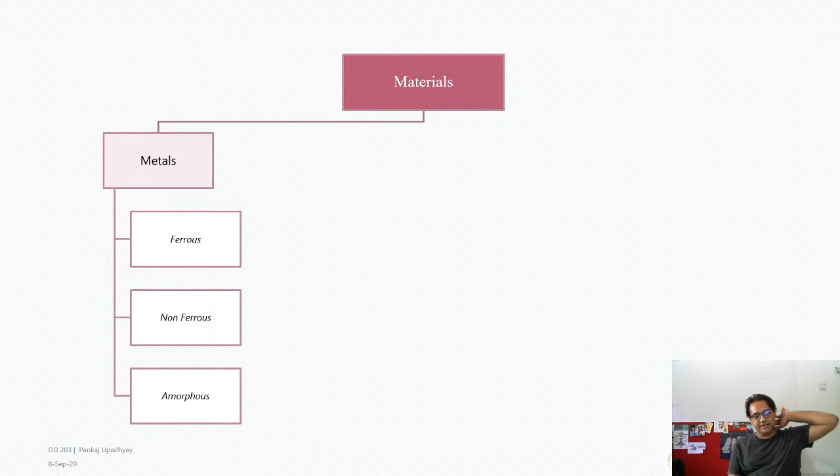But anyway, let's start off with the class. So we discussed this yesterday, and we discussed the kind of materials that are there, and from here on in this class, what we are going to discuss primarily is about properties of material.

So what do I mean by properties of materials? There are some interesting properties of materials which help us determine the uses of it. So, for example, some mechanical properties are important when you are designing for strength of a part - things like ductility, elasticity, hardness. We will discuss what each of these properties are. Some of them I think you already know, some may be new terms - like maybe fatigue is a new term for you. We will discuss very briefly what these are, and we will try to analyze how they may help us in the whole design process. And then there are some physical and chemical properties of materials, right?

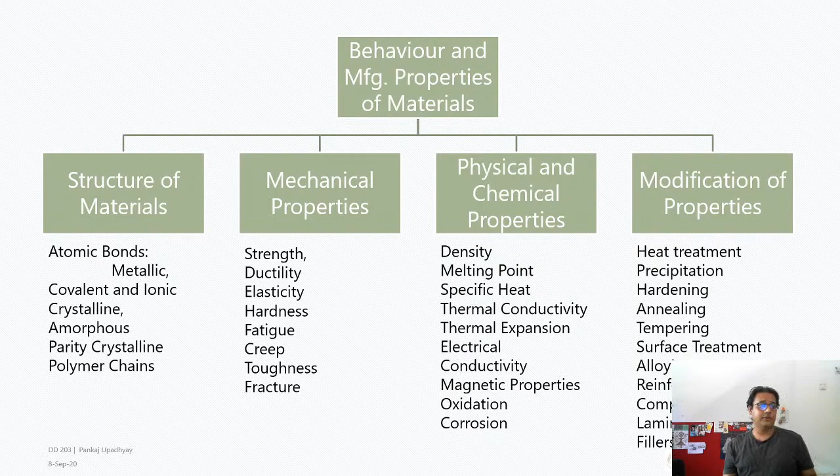Some of these topics you've already learned in your earlier classes, or rather I should say in your school, in your subjects. So let's take a look at some of these. I think most of you know about this - you are aware of these diagrams.

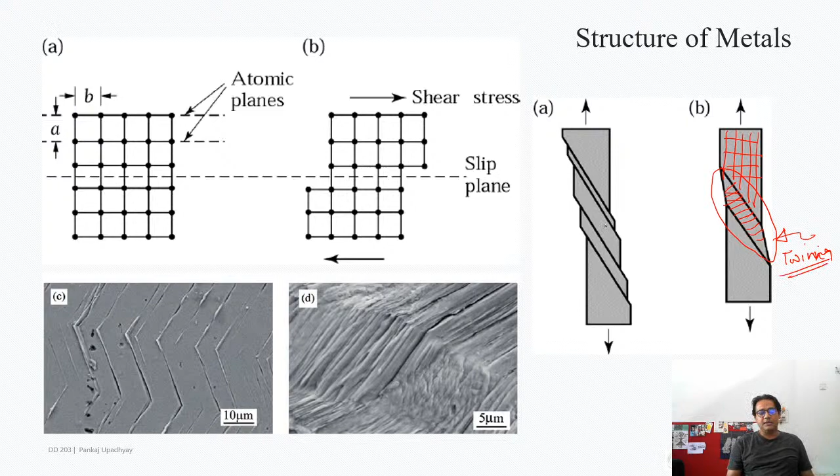So here let's say it is arranged like this, but as you start applying force, some part of this area, the whole crystal structure gets distorted, and you have this kind of failure where the crystal structure reorients itself to form this kind of twinning space. So this is called twinning.

Okay, let's move forward. Now those things I showed you were related to a single kind of crystal structure made out of a single element. Most often what happens is that you never get a proper element with a single crystal structure made out of a single element atom. In the real world it is almost impossible to get a single crystal block made out of a single crystal of an element without any impurities.

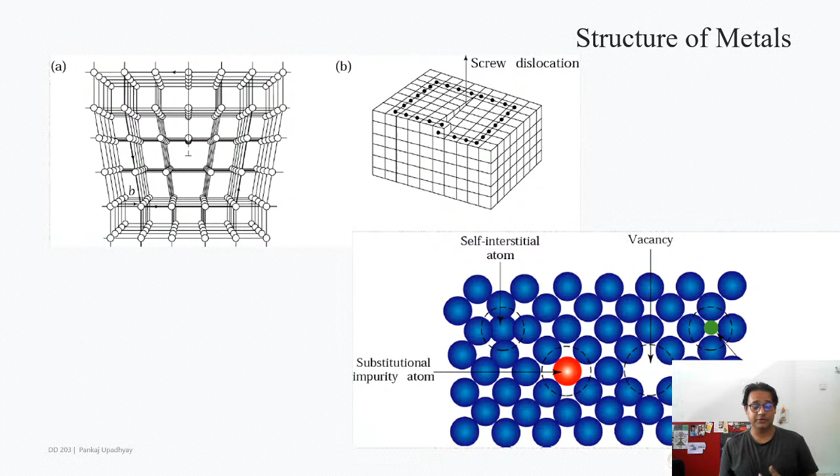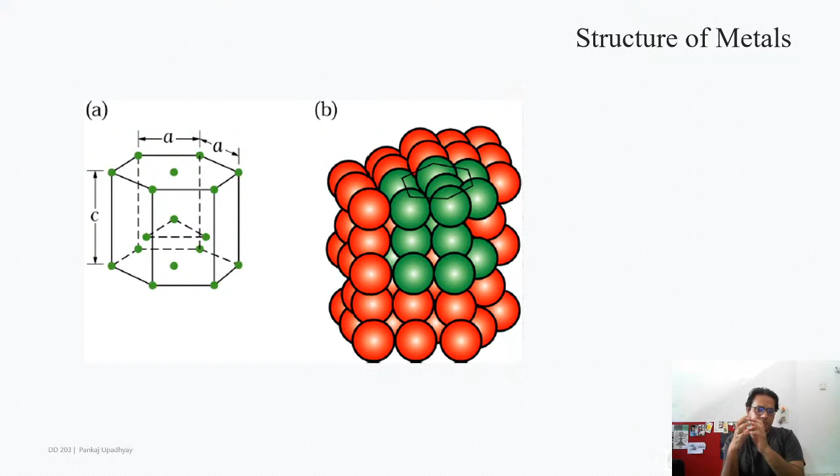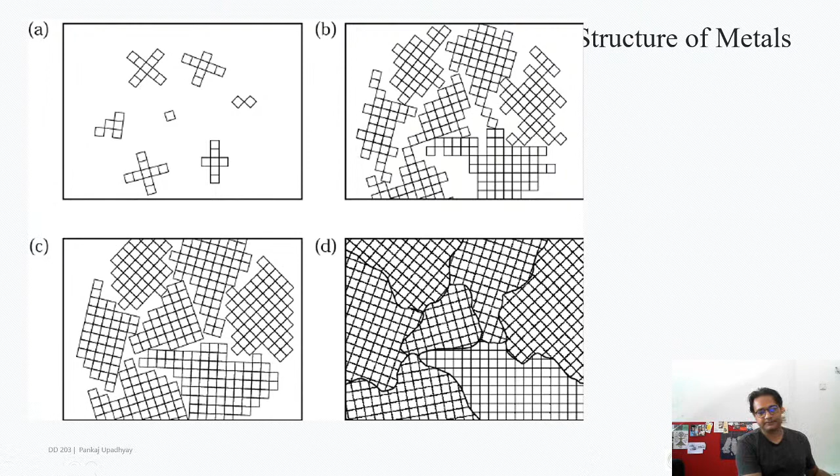So what we have seen is, at a very small scale, how atoms are arranged in a certain structure. This image shows a slightly zoomed out picture where a lot of crystals are arranged in a certain manner. And this one, if you zoom out even more, is what you will see. What you will see in a piece of iron under a microscope are these boundaries, like these boundaries.

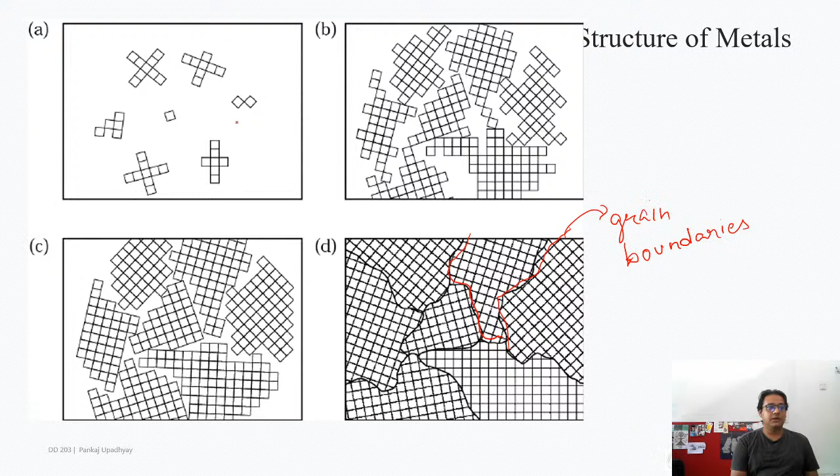These are called grain boundaries. The reason these form is because this white space is liquid material. In liquid material there is no crystal structure - all atoms are moving around freely. But slowly, as the material starts cooling down, in some places the first crystal is formed, then some more, then some more, and there's a small area where crystals have formed in a certain manner. Let's say this one is alpha iron, which is BCC, and similarly there are some more areas where another crystal forms.

As you can see, the orientation of all of these is slightly different. This one is oriented like this and like this, this one is oriented like this, and so on. As these grow, new crystals are formed at these locations, and these locations are called nucleation sites. As the crystals are formed, you soon reach a situation where the crystal can't really grow and bumps into the other growing group of crystals. As the material cools down, you get these kinds of boundaries which are formed - these are called grain boundaries, and these have a tremendous effect on the properties of material, especially steel.

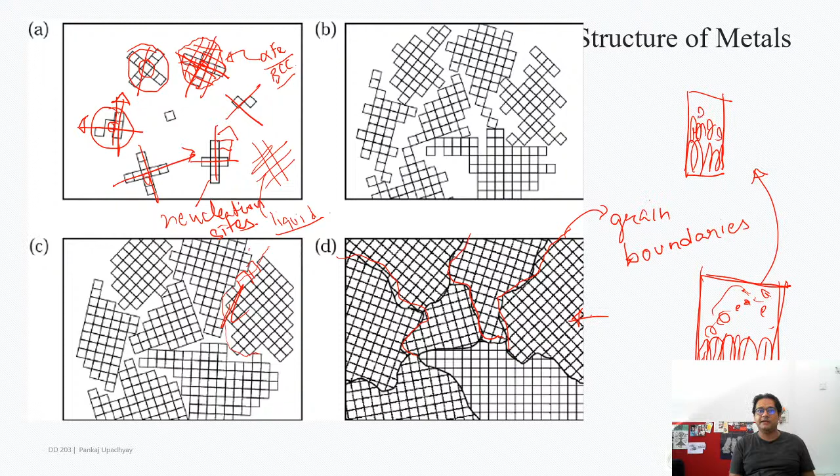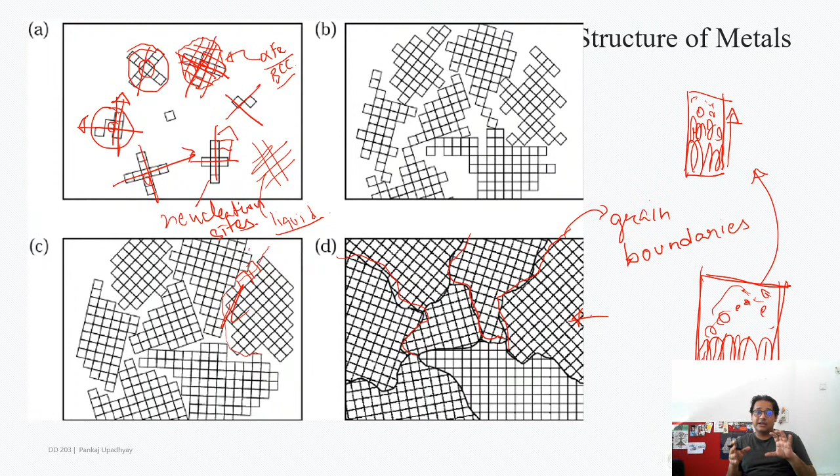Here you don't necessarily see the flow of the grains. But let's say you have a piece like this, and you have a bucket of molten material, and you cool it from this side. What happens is you will get a crystal structure something like this. Larger crystals are formed here because when nucleation started, all of this was molten and the crystal was able to grow along these lines. As it goes forward, you have smaller and smaller grain sizes. So finally, when this thing is cooled down, you will have the grains arranged in some manner like this. There is a definite direction and orientation to the grains, and the way the grain sizes are arranged has a lot of effect on the properties of the material.

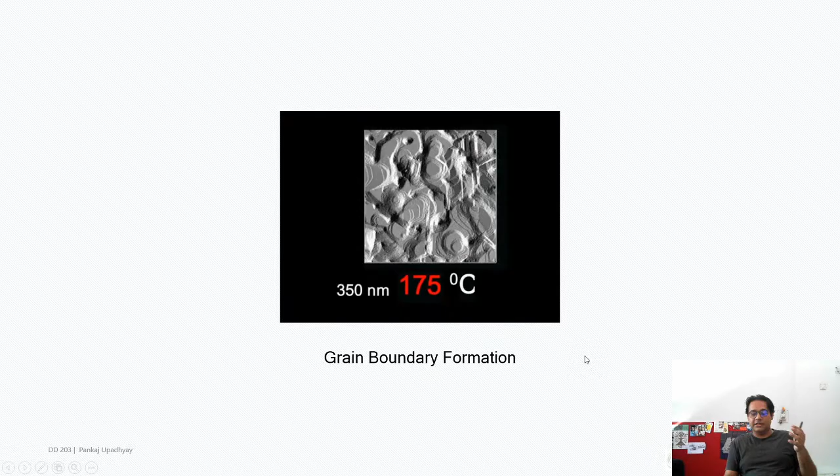Let's see if this runs - there's no sound here. Here you can see actually material getting cooled down, and the grain boundaries kind of disintegrating and merging into each other. I'll leave this in the presentation so you can see it later and observe very closely how things happen - this is the real thing.

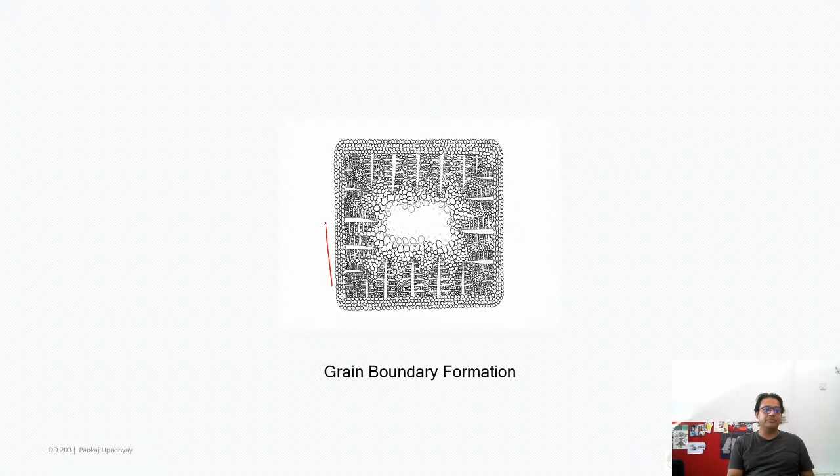As I said, if you have a block of liquid metal and you expose it to air, it will start cooling from the outside, since the most heat is removed from the outside, so you get this kind of grain boundary arrangement. As in the previous slide, each one of these dots have the grains oriented in a certain manner - which manner we are not particularly concerned with - but each one of these grains forms a space within which the crystal arrangement can be found.

Now you can see this in a lot of other places. If I just do a Google search, let me see, I will try to show you.

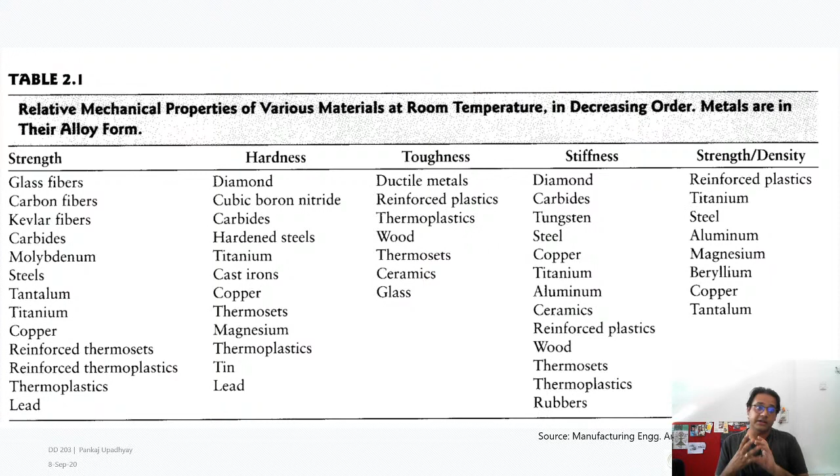Toughness - reinforced plastics and thermoplastics are tough, whereas glass is not tough. So now it's becoming slightly confusing. What exactly is toughness, and what exactly is hardness? There are specific ways in which we define these terminologies, like stiffness, strength, strength upon density. These are all mechanical properties important for us to know about in a material while selecting it. So I want you to search and find out and understand very clearly what toughness is and what stiffness is. We will discuss it still, but let's move forward.

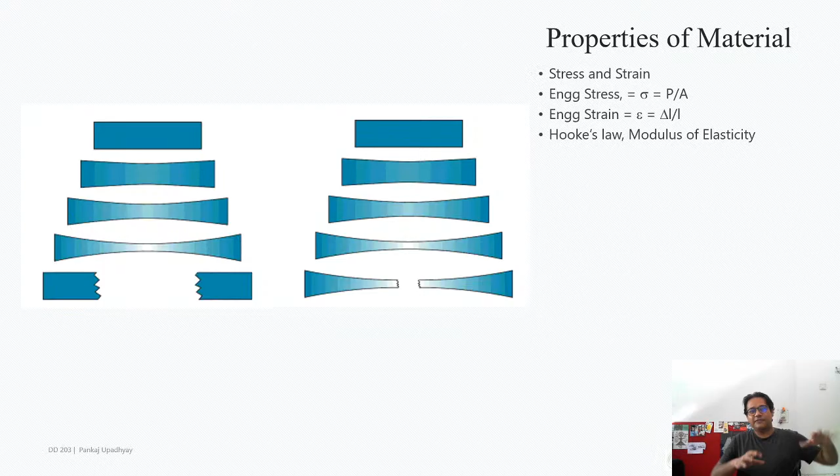So again, this is one of those slides where I ask students, can you tell me which material is elastic and which material is not elastic? Something like that. But I will keep this slide here for you. The important point to take from this slide is there are two very important properties of material we should know about when selecting materials: stress and strain, or rather how much can a material...

WBN is the hardest, I believe. I think it's not a naturally occurring material, but I may be wrong. I don't know what WBN is. Ace says WBN is the hardest, I believe. Okay, we will see.

So you have read about Hooke's law. Hooke's law defines a constant called the modulus of elasticity, which is the ratio between the stress and the strain in a material. What is stress? Stress is the amount of force per unit area applied to that material. Let's say a standard piece, a cylinder, is taken, and you apply force on both ends - a certain amount of force. If you take the cross-sectional area and divide that force by it, you find the stress that part is withstanding.

As long as a part is not breaking, it withstands that stress. Strain is the amount of elongation, or rather the ratio of the elongation to the length. So let's say it's a cylindrical part, and we apply a force enough to move the piece, stretch it a little bit. How much it has stretched relative to its original length, that is the strain that piece is going through. The ratio of the stress and strain is Hooke's law.

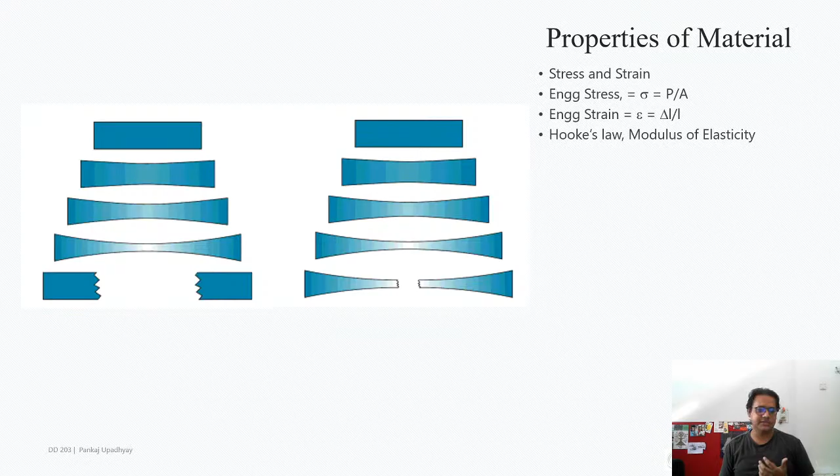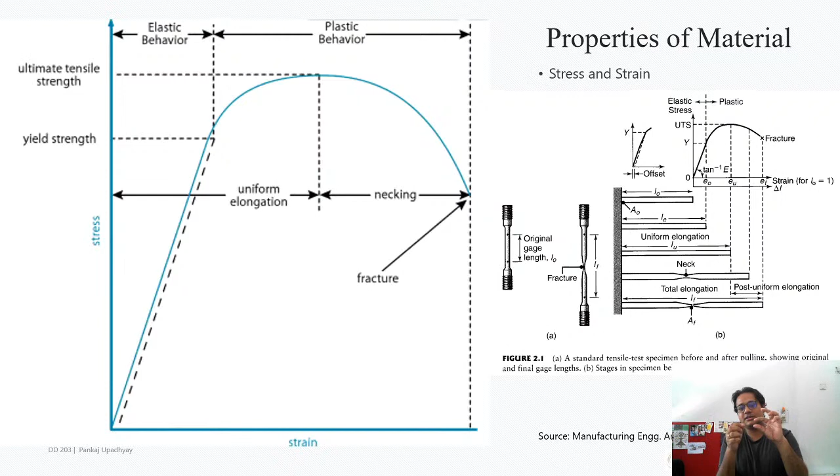I'm going to say something a little disgusting here, but you can see this. Take a chewing gum, eat it, and if you're not disgusted by it, take it out, hold it nicely, and apply a little bit of force. Once you start applying just a little bit of force, it will start elongating. So with very little application of stress, the part is seeing a huge amount of... Aditya, don't do that with boogers, please.

First material is elastic, is what Shreya and Devanshi are saying, right? Okay, we'll come to this.

There will be a point where, with the existing amount of force already applied, the material will keep elongating without any additional stress. This point is called the ultimate tensile strength. This is where the material has started failing, and you will not be able to apply more stress because the material has started deforming so much that there is a loss in internal stresses, so the stress the part is withstanding decreases.

At one point, the area where the graph comes down is called the necking area, and eventually the material will break. This is what you will see has happened.

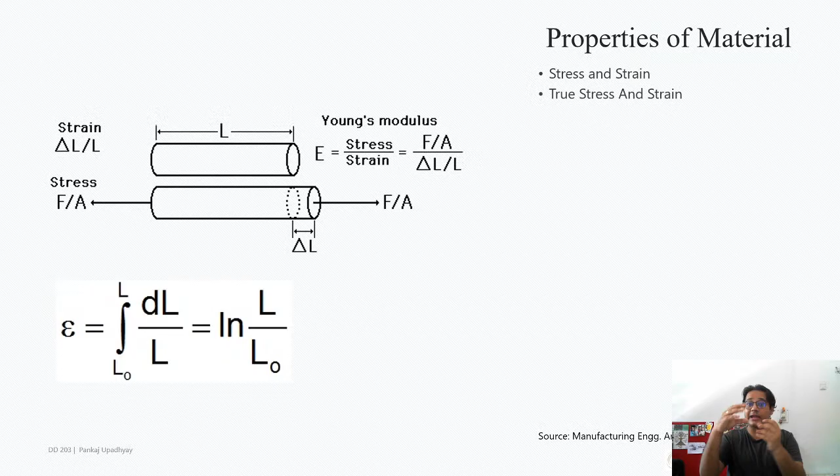So what you saw here, the Hooke's law, is actually, I shouldn't say wrong, but it is slightly misguided, because one thing that is not considered in Hooke's law is that as you are applying more and more force, as the part experiences strain, there is a distinct change in dimensions of the part, meaning the area gets reduced. That is not considered in Hooke's law, but you need it when you want to calculate things more accurately.

No, Cyril, I think the video, I saw the message, the video is public right now. Okay, anyway, let's move on.

As I said, in Hooke's law, that change in area is not considered. So we can calculate the true stress and true strain by considering this change in area. There is an integral way of calculating this using integration, but it's not important. I've kept this equation here for you to reference later.

Ace says you won't lose the lecture, it will just get demonetized. Yeah, anyway, I'm not looking to make money out of this, but okay.

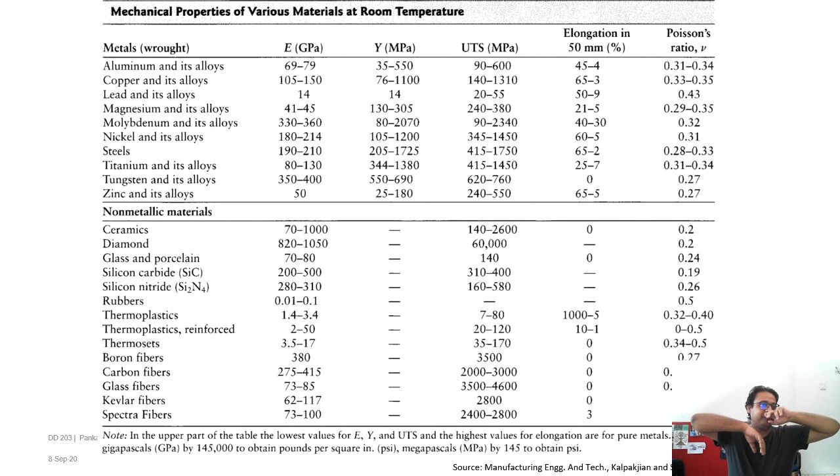Right, so that was Hooke's law, and the ratio of stress and strain is called the modulus of elasticity, or the Young's modulus. I think that was clear, right? There are two more constants which we will not talk about here, but if you read the section in the Kalpakjian book, you will get to know all of this, and I suggest you do that.

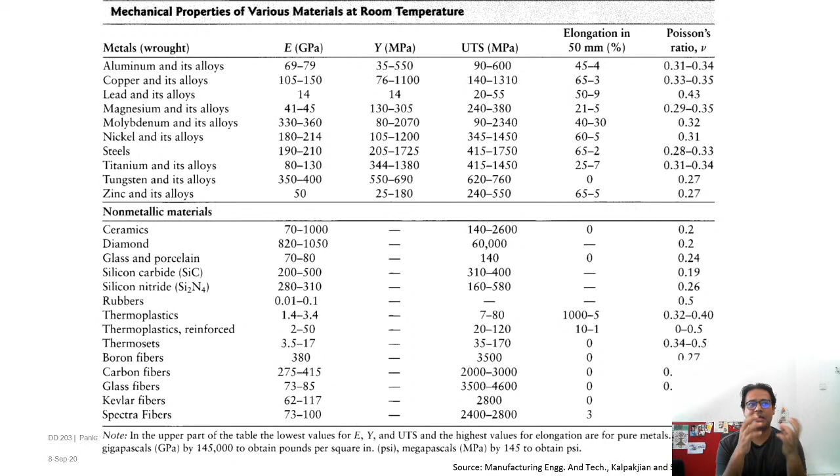Right, okay, so in this slide we are showing the modulus of elasticity, the Young's modulus, the ultimate tensile stress, for various materials. Aluminum and its alloys generally have a modulus of elasticity of around 69 to 79 gigapascals, whereas Y is the yield strength and UTS is the ultimate tensile strength, right?

So yield strength goes from around 35 to 550. You can see, based on this chart, you can analyze which are the strongest of all materials and alloys. Especially, for example, molybdenum and its alloys have a tremendous range of yield strength. So the amount of stress required to reach a point where the part is no longer usable - you need a significant amount of stress for certain molybdenum alloys. This chart really helps you understand that.

Okay, I'll keep this up. There's no point discussing the numbers in detail, it's there for you to reference. I won't ask it in the test - what is the yield strength of titanium and its alloys? I don't expect you to remember, but it's there.

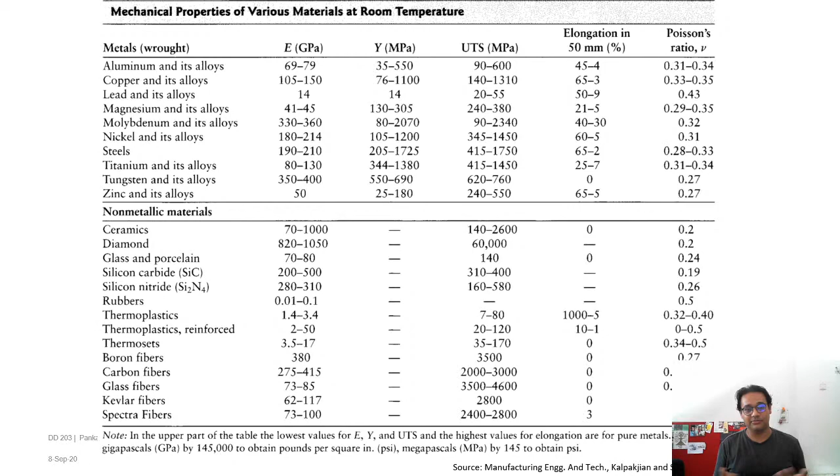So let's take a look at this video, and we will discuss. We will pause the video. One thing I want to tell you - just tell me if you can hear it.

The tensile test. First test, material with yield point. In the tensile test, a plain carbon steel with yield point phenomenon is to be tested.

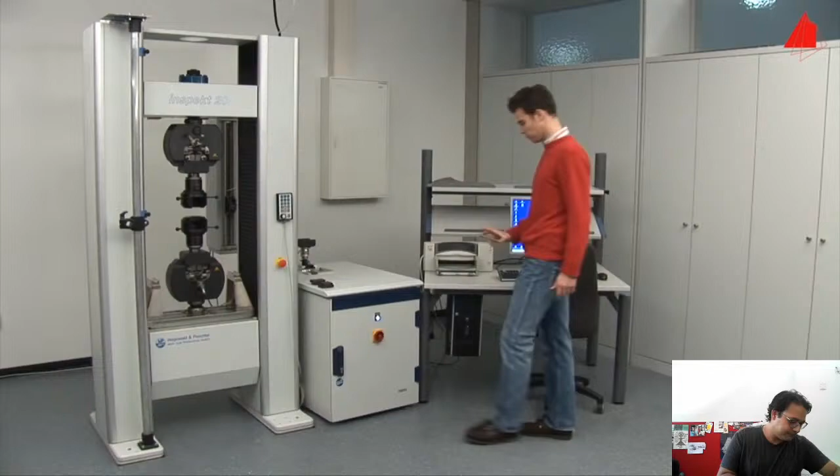Right, okay, this is the test piece. It has - if you can hear it without an echo, it's good - an original diameter of 10 millimeters and an original gauge length of 100 millimeters.

Sorry, what happened? Within this test region, distance marks have been drawn at regular intervals. They help to visualize and measure the plastic behavior of the specimen. Using a hand control, the tester moves the upper cross head into its correct starting position. Now he can place the threaded ends of the test piece in the lower and upper grips.

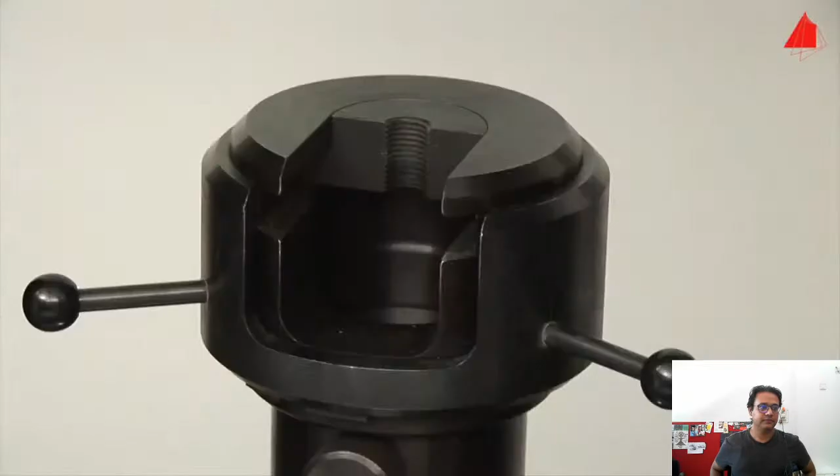So this is the test piece that I was talking to you about, right? And as you can see, it has these grooves at the end so that you can clamp it nicely. And this guy has drawn some markings on the test piece for him to be able to easily visualize the whole thing. Okay.

In the next step, he swings the extensometer into its working position and checks that everything is correctly prepared. Then he selects all necessary testing parameters on the control computer.

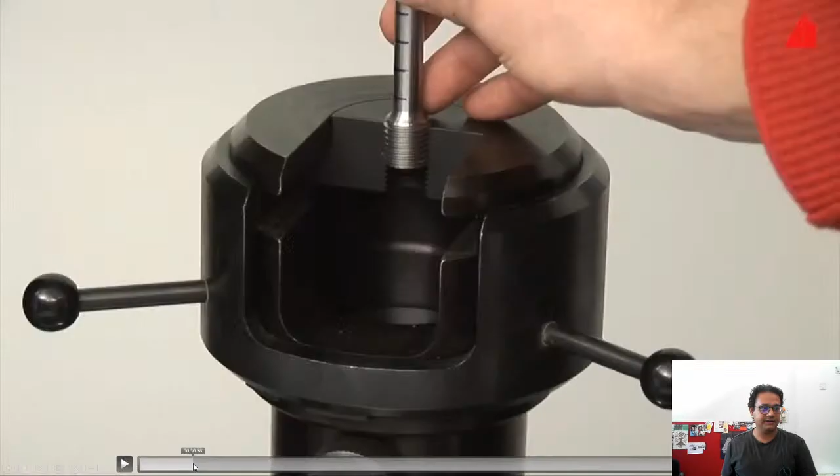Right, I'm sorry, I am terribly sorry. He swings the extensometer into its working position and checks that everything is correctly prepared, then selects all necessary testing parameters.

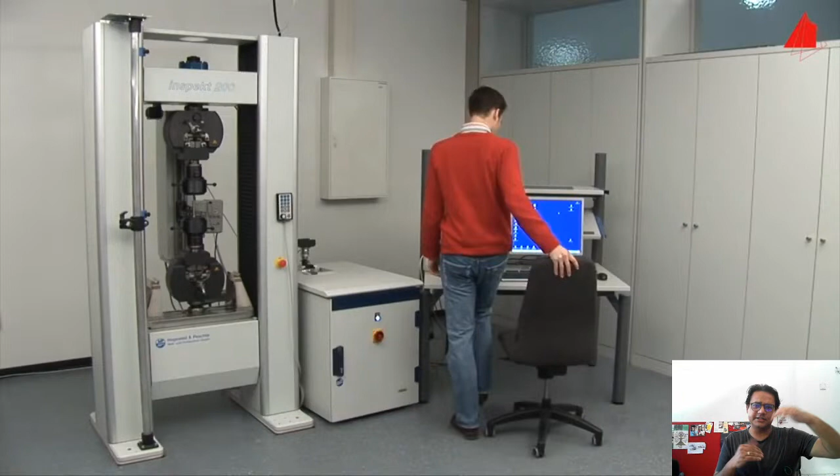So the extensometer is basically a device to help you see how much elongation has happened. It's a device for calibration of the whole test, on the control computer.

Ready, the test starts and the extensometer's sensor arms are carefully pressed onto the test piece. This way, the gauge length can be measured throughout the whole tensile test. The gauge length is displayed at the bottom right-hand corner of the screen. At the beginning, it amounts to 100 millimeters.

So this is a video explaining not just the tensile strength, but this kind of machine, and the company who makes these machines puts up these videos. So it's a really good resource for students, that's why I put it over here.

During the tensile test, the test piece is slowly and constantly elongated with a standardized speed. On the side you have something in kilonewtons, which is the force being applied, and he's saying WEG, I think it's in German, but this is the actual elongation. This is not the strain, but it is going to be representative of the same thing, right?

So the force that the test piece opposes to the imposed elongation is recorded and can be seen at the bottom left-hand corner of the computer display. The material behavior can best be observed in a force elongation diagram. The force F is plotted upwards on the vertical axis, the elongation delta L towards the right on the horizontal axis. At first, the force rises rapidly. Force and elongation are proportional and form a steep, straight line in the diagram. In this area, the material behaves elastically.

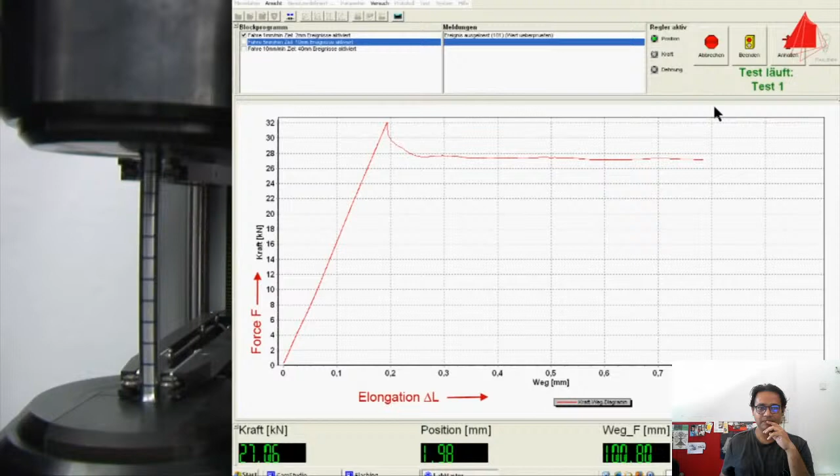If the test piece were to be unloaded now, it would not spring back to the original length, but instead show a permanent elongation. In the next stage of the tensile test, an almost constant force level with slight fluctuations occurs. So think about what is actually happening—you can't really visually see it in the specimen until it reaches a certain point.

Till now, the length of the test piece has increased slightly, and now at this point there is a certain amount of increase happening, but the internal stresses are not changing. You are applying the force, but internally the material is giving way—it's not withstanding that stress. That is what is happening at this point. This phenomenon is called the Lüders effect.

After a certain strain, known as the Lüders strain, the force increases again. The material opposes an increasing force against the imposed elongation. It strain hardens. Here is an interesting terminology: strain hardening.

So what is happening is that as you apply this force, the material is made out of these crystal structures, grain boundaries and crystal structures. Internally, what is happening? Imagine why does the material elongate? There must be some crystals which are kind of breaking, changing shape from their original shape, and these atoms are probably shifting to new positions, and the orientation of the crystals is changing, or the grain boundaries are probably separating and disintegrating. Because of this internal phenomena, something called strain hardening happens, which is the material is able to withstand a little more stress because of this internal locking of the grains, or the arrangement of the crystals.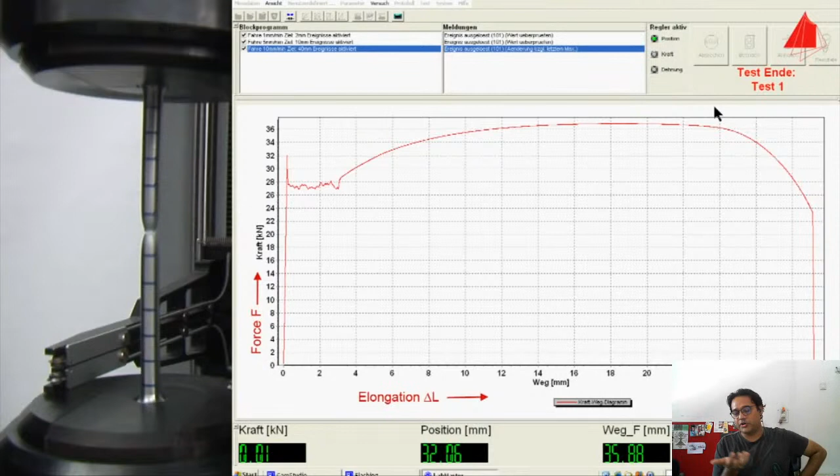You can see this graph, which is a beautiful representation. It is slightly different than the graph I showed you before, because that graph was not for a material which displayed a yield point phenomenon. This material displays a yield point, and most likely it is steel, maybe a specific type of steel, I'm not sure what, but most likely steel. Now let's go forward into this video and see.

In the recorded force-elongation diagram, the force FeH at the upper yield point can clearly be seen. This is the highest force the test piece can sustain elastically. FeL is defined as the force at the lower yield point, and Fmax as the maximum force.

Devanshi asks what determines the position of the neck. I cannot clearly give you an answer, but I'm only guessing right now. I think it is the overall dimensions of the part, where the stresses build up at a point where it is most likely to fail. For example, if you have a cylindrical piece with a small cut or groove at one point, so there's a change in dimension somewhere, the stresses get localized there, and I think the neck would form there. But I'm guessing now, trying to do an educated guess, but yeah, I think that is what happens.

Here, one thing I would like to point out in this chart is that the thing that should concern designers is the FeH, FeL level. You should always design around that.

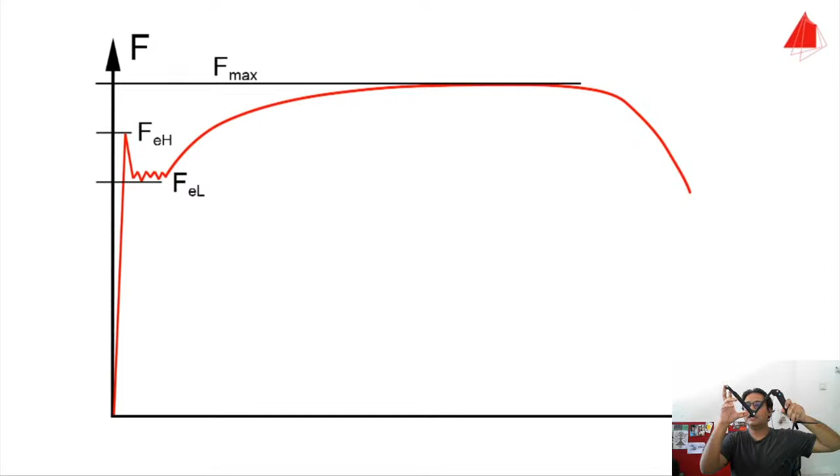Let's say I have a tripod like this, and this part I have designed so that some weight is always kept over here. When I keep that weight here, it will experience a stress of FEH. That's never a good idea, right?

What if there is some amount of extra force that somehow comes in? So you always employ something called a factor of safety. You design for a load which is probably 1.5 or 2 times lesser than this, like half. So the maximum force this part can withstand will probably be half of this.

That's a thumb rule generally followed in engineering, and the reason is that you can never anticipate all the forces, all the loads that a part will undergo.

There will definitely be, let's say, a tensile stress that may be applied to a part, but what if there is a compressive stress applied? What if there is some kind of shear stress? By shear I mean pushing one side this way and one side that way. Somehow, because of wind or something like that, that kind of force comes into play.

So ensuring that you are designing at about a 1.5 factor of safety level ensures, somewhat by a thumb rule, that these other forces or stresses are also considered in the part. Using these forces, the strength properties of materials can be calculated.

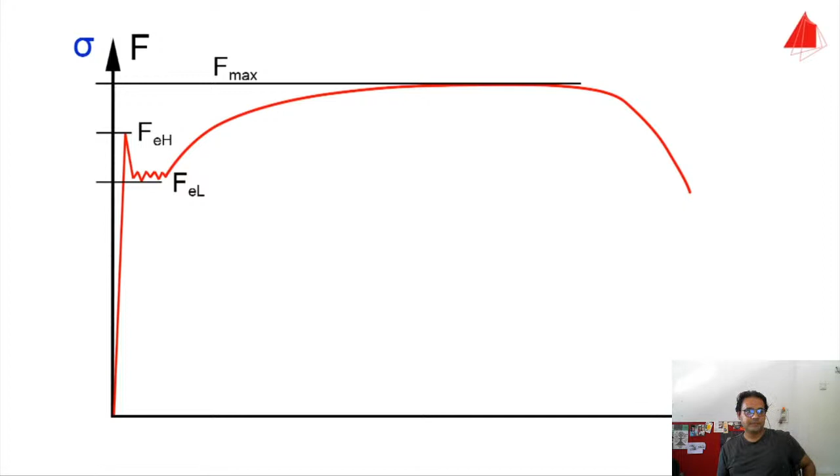Let's see the calculations. The upper yield strength ReH is calculated by dividing the force FEH by the original cross-sectional area S0. The lower yield strength REL is defined in a similar way. The maximum force divided by the original cross-sectional area is called tensile strength Rm.

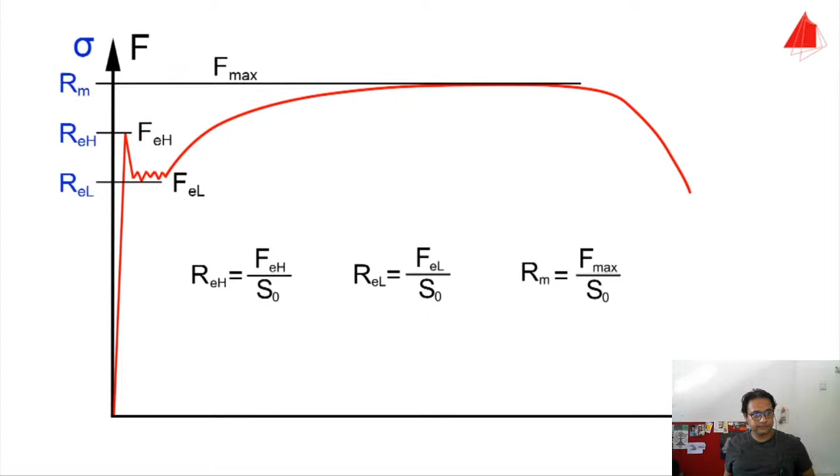In the last step, the tester swings the extensometer back into its resting position and removes the broken test piece. On the work table, he puts the fragments back together again. With the help of the distance marks, the percentage elongation after fracture can be determined.

So this is the permanent strain after fracture. This is what was initially put in this example - look at the amount of change that is there.

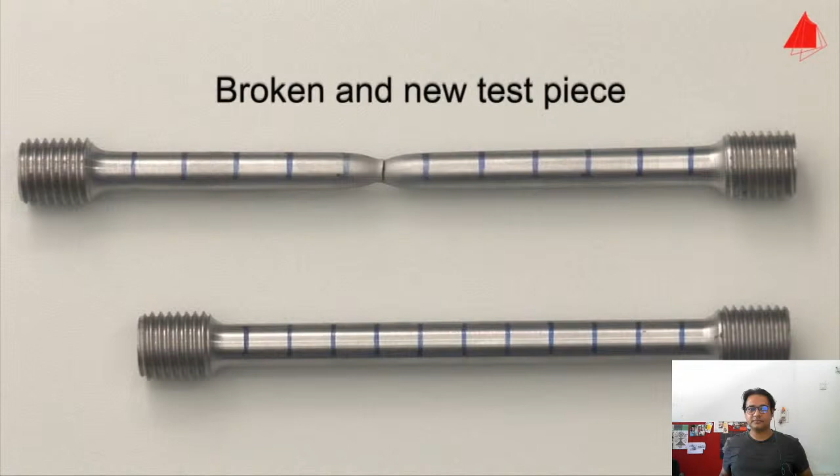The percentage elongation after fracture depends on the length to diameter ratio. By measuring the smallest diameter at the point of fracture, the percentage reduction of area can be calculated. It describes the reduction of cross-sectional area at the point of fracture in relation to the original cross-sectional area.

In the second tensile test, a material without yield point phenomenon is to be tested. So this most likely is a precipitation-strengthened aluminium alloy. So it is an aluminium test piece alloy.

It has exactly the same shape and dimensions as the specimen in the first test. So as you can see, we are using a specific type of specimen - this is a standardized dimension.

So the stress strain graphs that you see are of this specific dimension. If you change the dimension, naturally some things would change, but it is standardized for us to make a good engineering judgment of how this material will behave.

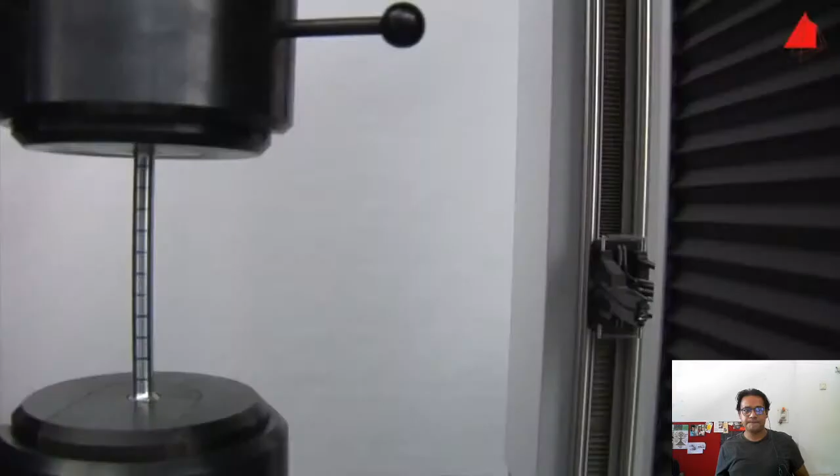It is cylindrical with an original diameter of 10 millimeters and an original gauge length of 100 millimeters. After fitting the test piece into the testing machine and panning the extensometer into its working position, the test can start.

Yeah, so the same thing happens, and let's see how this graph is different from the other, right? Let's see the whole test.

The initial linear curve in the force elongation diagram again shows the elastic behavior of the material. At this point, if you leave the material, it will come back to its original dimension. But this time, the end of the elastic area is not revealed by a sudden drop of force or any distinct change. There is a smooth and gradual transition from linear elastic behavior to plastic deformation.

So you can see the part moving on the left hand side. The force increases and the test piece again is strained uniformly along its length. At the point of maximum force, a neck develops and all subsequent plastic deformation is confined to this neck until fracture finally occurs there.

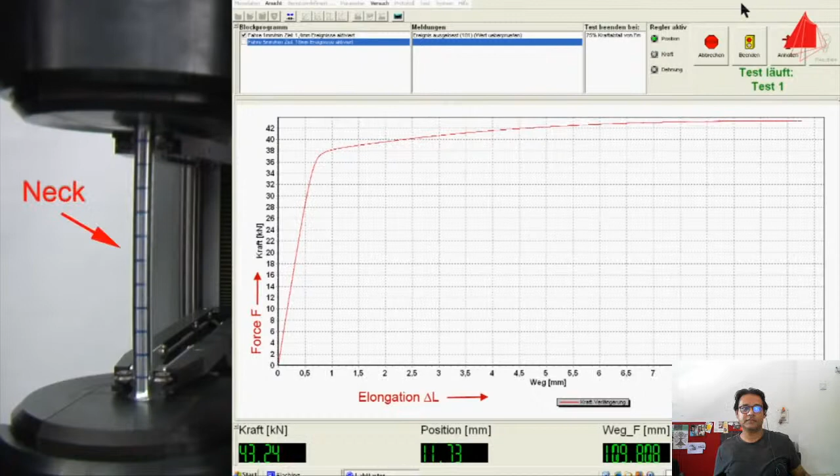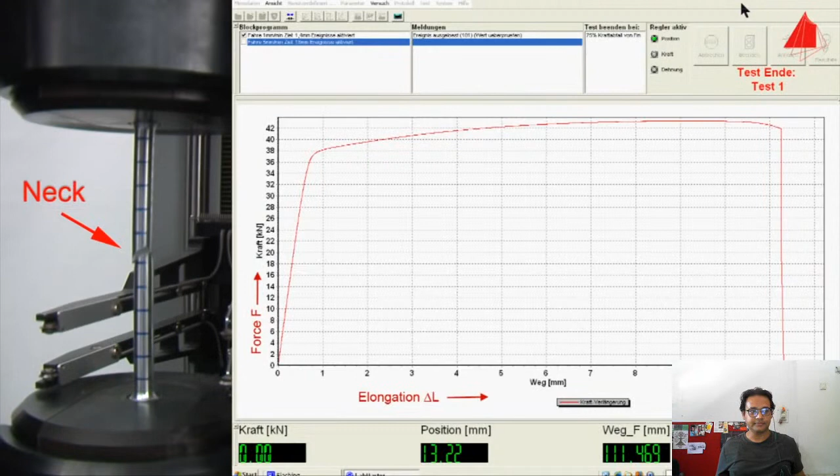As a common substitute for the yield strength, the 0.2% proof strength is used.

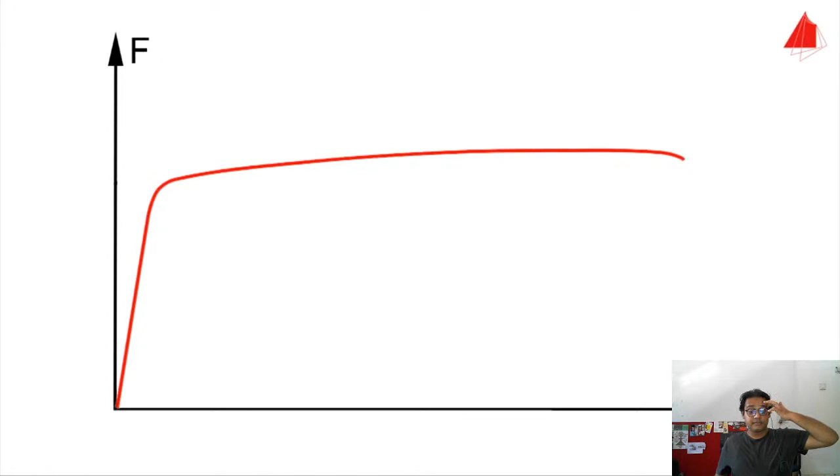This is the way to calculate it. First, the elongation that corresponds to 0.2% of strain has to be computed. For an initial gauge length of 100 millimeters, the result is 0.2 millimeters.

So what she's trying to do here: in a material with a distinct yield point phenomenon, you can clearly say this is the elastic range of the material. But with materials that do not show a yield point phenomenon, how do you say that this is the elastic range? Because there is a smooth gradation.

So what they do is take a standardized measurement. They say that till 0.2% of the dimension of the test piece, which comes to 0.2 mm, we will consider that as not really having any change in the test piece. We won't consider that change. So with that idea in mind, she'll draw a straight line.

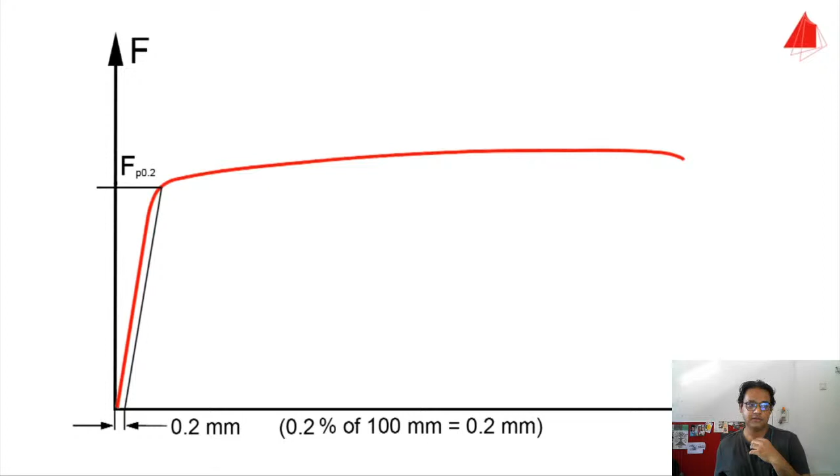In the force-elongation diagram, a straight line parallel to the elastic line is drawn through the offset point of 0.2 millimeters of elongation. The force at the intersection point of the offset line with the force-elongation diagram is designated as Fp 0.2. This is the force that causes a plastic strain of 0.2%. This Rp 0.2 is considered the yield point of the material.

0.2% proof strength Rp 0.2 is equal to Fp 0.2 divided by the original cross-sectional area, S0. We need not see this part.

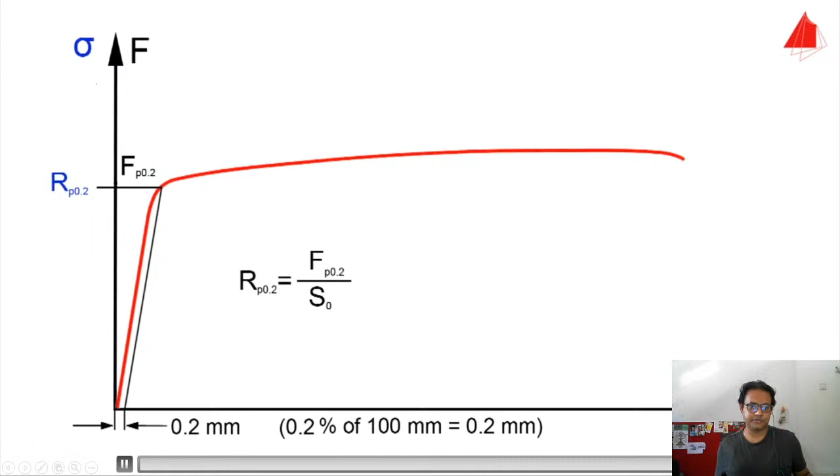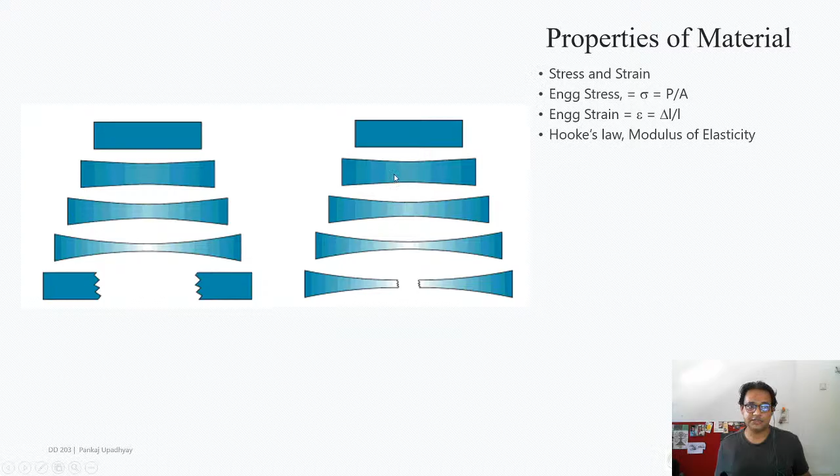Now I will go back to one of my previous slides and ask the question again. Forget the three middle stages, don't consider them. If you don't consider these three middle stages, what do you think is the difference between this material and this material? You can put your answers in the comment section or the chat box, and we'll move forward.

So we saw the tensile test for a metal. What is the tensile... how does the...

Aditya says the one on the left didn't go beyond F max. Devanshi says first is plastic, ductile, and non-ductile. One of the materials has shown a yield point phenomenon, the other has not. Whether it is ductile or not, you can only say once you see the whole thing. But yeah, I think the one on the left hand side was more ductile.

Okay, so this is the stress strain curves. What you see on the screen is the stress strain curves of how you can gauge the properties.

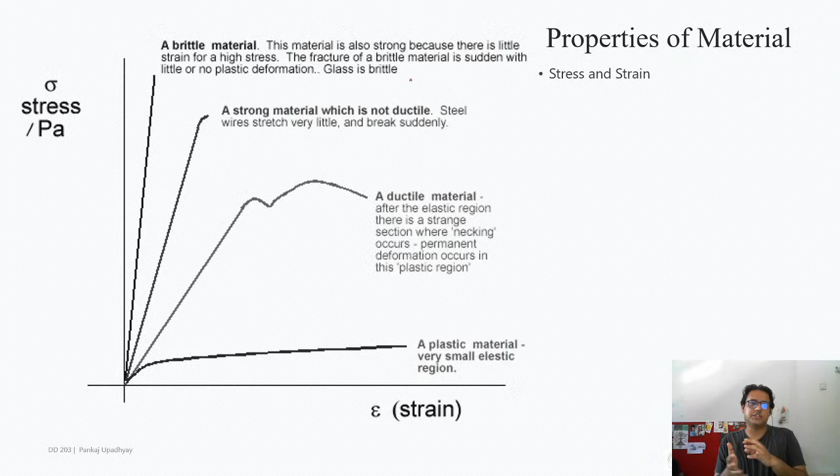Let's say one with a very brittle material will have a very straight stress strain curve, and suddenly there will be no more. That means it is broken here, it breaks here.

A strong material which is not ductile at all, let's say like a steel wire or something like that, it will have a linear section, an elastic region, and then it will break.

And some like a ductile material, both we are considering, which shows and does not show yield point phenomenon, something like this you will see. And a very plastic material, there will hardly be any place which is elastic, where if you remove the stresses in the material, it will come back to its original point. You will always see this place where as much stress the part is experiencing, the strain or the dimension are getting changed.

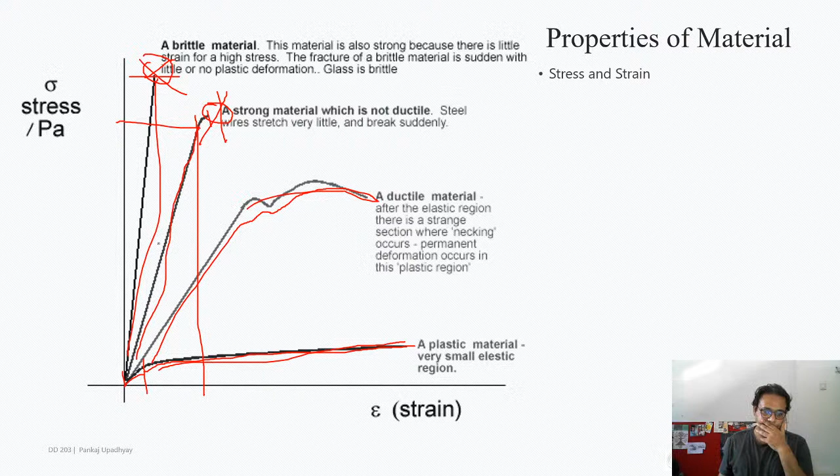Okay, let's move on to other things.

So with this we come to these other material properties. The first one is ductility. What do you think ductility is? Ductility is the amount of plastic deformation - that means the amount of change in dimension that the material can undergo before completely disintegrating, before completely breaking.

So we are considering the whole range of the stress strain curve. It is not just the initial point where the material is elastic, but the whole range till you can completely break the material. So if you want a material which is ductile in nature, you would have to find something where the break point is quite higher - the amount of strain the material can show before coming to the break point is very high.

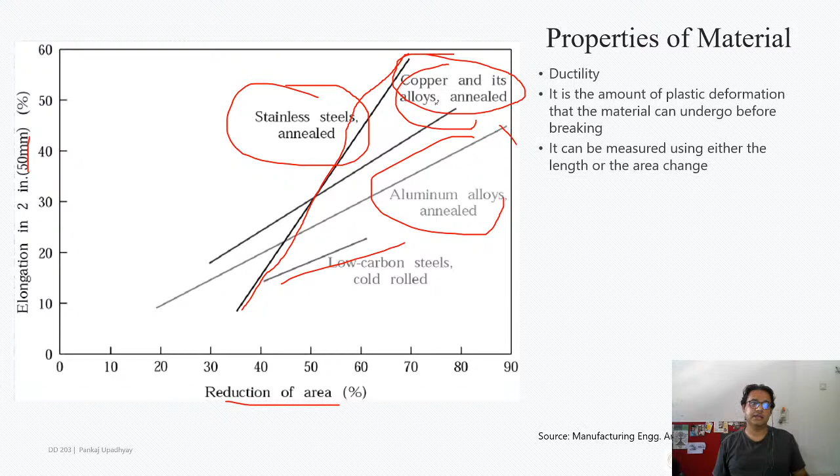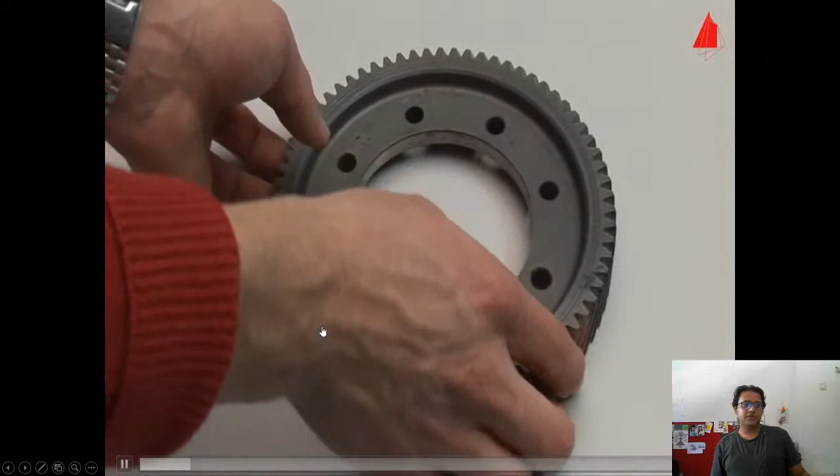In this video, we will show how the Rockwell Hardness Test works using a gear wheel. The basic idea of this test method is to measure the permanent depth of indentation of a hard indenter under a test force. In the process variant Scale C, a rounded cone made of diamond is used as an indenter. In step 1, the diamond cone is pressed onto the test piece surface with a minor force of 10 kiloponds. The depth of indentation under this preliminary load is the reference point.

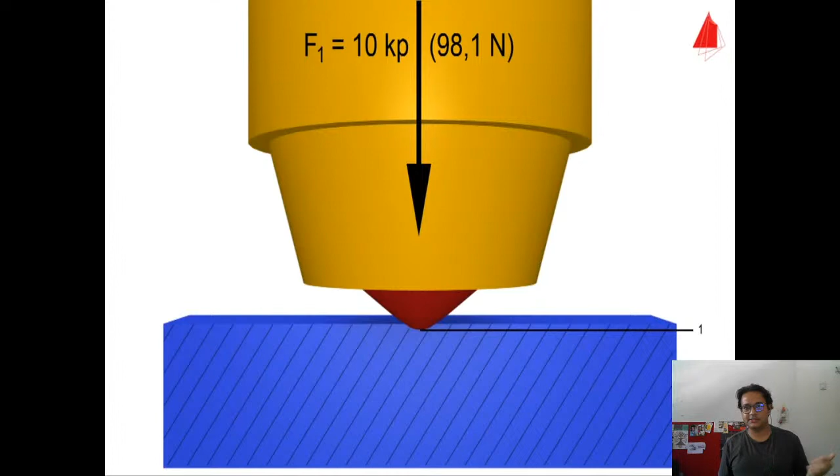Before we go into this, we first have to know what exactly hardness is. What do you think hardness is? You can put it in the comments, or I will explain it to you. So hardness is basically the ability of a material to withstand indentation - scratches, in layman's terms.

So have you done this before? This is your cell phone, right? And this is my cell phone, not your cell phone. And this is a cutter. Should I do this? Some of you who've seen Jerry Rig Everything videos would know that nothing happens if you scratch. Why? This is glass, this is steel - glass is harder than steel.

And yeah, Aditya, nothing really happens if you scratch it, right? If I really put my force into it also, I think - just a second. Right, if I just - right, nothing happens, because glass is harder than steel.

Okay, so hardness is basically a relative scale. A harder material would scratch a softer material. So diamond is the hardest material that way. Glass breaks, says Sanay - glass definitely breaks, but we are talking about hardness here, which is the ability to withstand scratches.

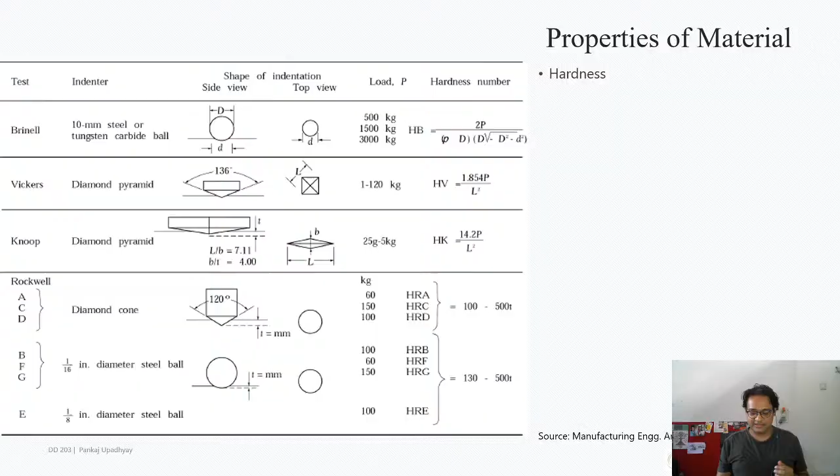Let's move on forward in the presentation. Similarly, you'll have Rockwell and Brinell hardness tests. You'll see this video later, okay?

Let's move on, and I want to introduce you to something called fatigue. Demon Gaming says scratches at level 6 and a deeper groove at level 7 is correct. I think you should put that link of the video somewhere.

So we are talking about fatigue. What is fatigue? When we say we are fatigued, that means we've done something for so long we are tired, right? It's almost the same kind of analogy in material science. So if you take a piece of material and put a cyclic load on it - meaning you put the load and remove the load, you keep this cycle going - there will come a point where, for materials like aluminium, after a certain number of cycles, it will break.

You can test it very easily. Take two wires, one which you're definitely sure is aluminium, one which you're definitely sure is steel, and keep on bending it one way or the other, like this. The aluminium one will break, and most likely the steel one won't, but it depends on the kind of force you're applying, the material, the alloy, and so on. One thing is for sure: the aluminium will break much faster, because aluminium has a low fatigue strength.

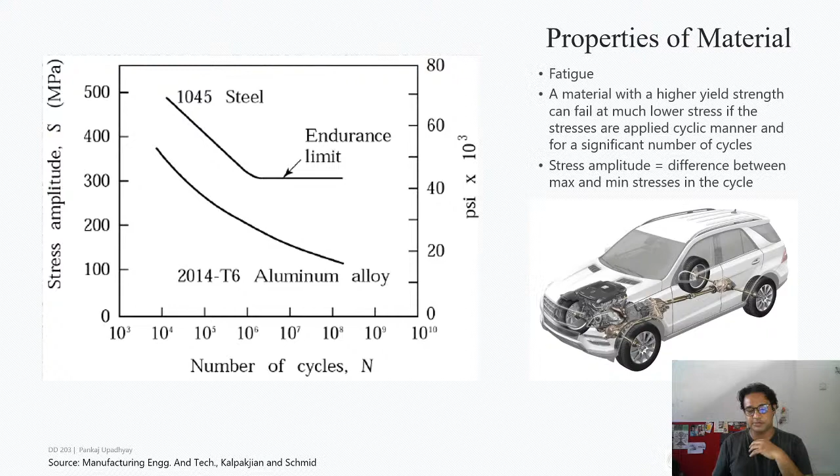If you take, however, a cyclic load of say 400 megapascal, it will definitely fail after so many cycles. This is fatigue strength. This property becomes very important in something called reliability engineering, where you want to find out the number of cycles, or number of load bearing cycles, a particular product can withstand. So this property becomes very important, among other properties.

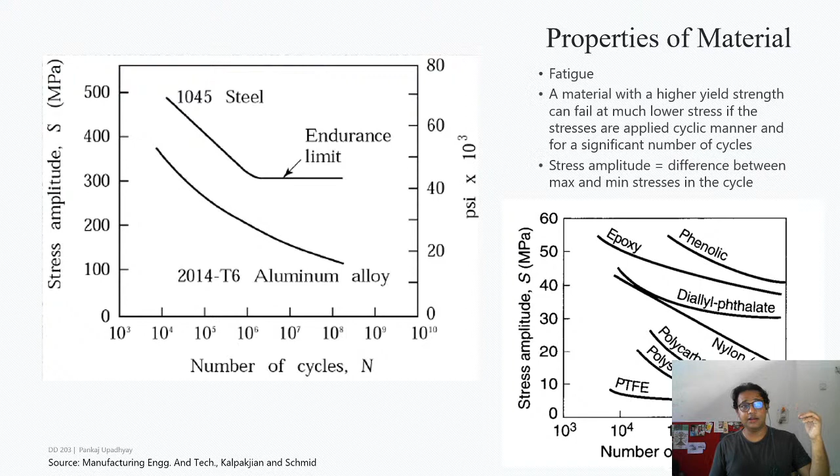As you can see, this is for plastics, and plastics have a definite endurance limit. This shows you various kinds of plastic. Or rather, not endurance limit, it's the fatigue point of breakage—point of breakage because of fatigue.

Okay, toughness. What do you think is toughness? Let's see some of the questions. I'm sorry, I think even this is going to go on for some more time, but we'll go on till we reach one point.

Carbon fiber is actually a fiber cloth before hardening. They said you place a lot of layers, attach and harden them together, then it becomes strong. Somewhat correct, Tejas—you have to use a method of binding these fibers, because they don't actually stick together just like that. You need some material which binds the fiber cloth together, typically some form of epoxy resin, though there are different options and it's an area of vast research. I'm not sure exactly what's used in the real world right now, but you need some binding agent. Aditya says carbon fiber mostly depends on how it's made—it depends on what you mix in. It can be fragile or flexible depending on the resin you mix. I think that's correct.

Let's go on forward and look at this property called toughness, another very important material property. There's a very interesting test called the Charpy impact test—let's watch the video together.

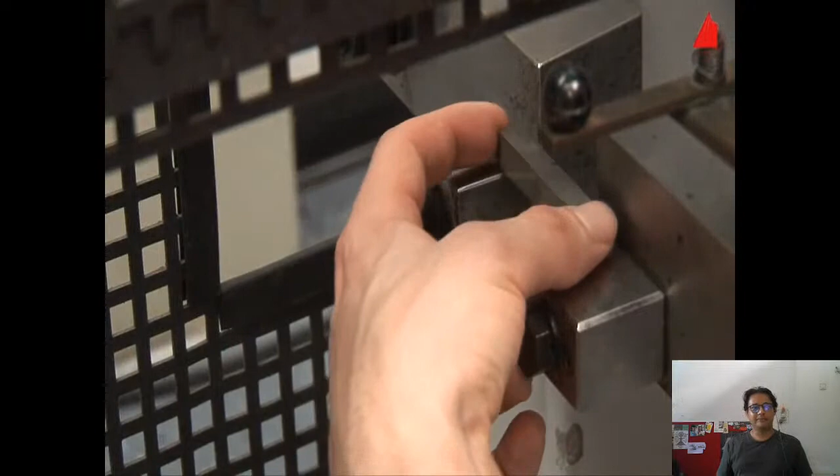The standardized Charpy impact test has been designed to measure the toughness of materials under impact loading and a multi-axial stress state. A pendulum impact testing machine is used to do so. The pendulum on the machine has a heavy weight at the end. This is lifted into the starting position in step one.

Can we just say, poor guy in the red sweater?

Then the tester checks whether the testing machine has been adjusted accurately. In order to do this, he turns the drag indicator downwards and releases the pendulum without a test specimen. The drag indicator stops at position zero. This proves that the pendulum has the correct starting position and that the friction is correctly compensated. So basically, the machine is ready for the tests.

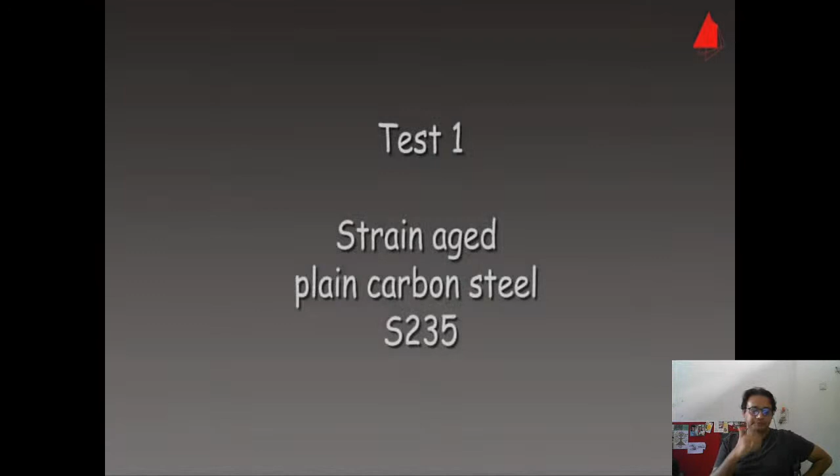First test: strain-aged plain carbon steel S235. This is our test specimen. It has been machined to standardized size and shape with the characteristic V-shaped notch. The tester places the specimen on a support in the lower part of the machine and adjusts its position with a centering device. Next, he turns the drag indicator downwards again and checks that everything is prepared correctly.

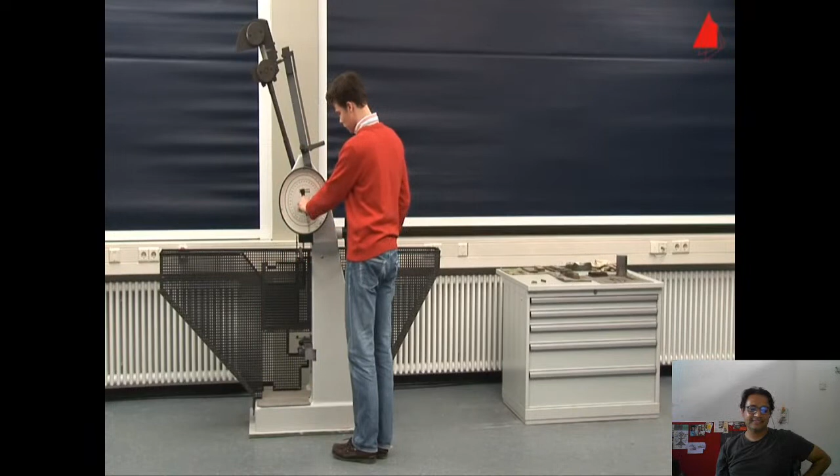Perfect, the test can begin. The pendulum is released, it swings downwards and hits the specimen with its rounded hammer peen. The specimen absorbs part of the pendulum's energy, so the pendulum doesn't reach the full height on the other side.

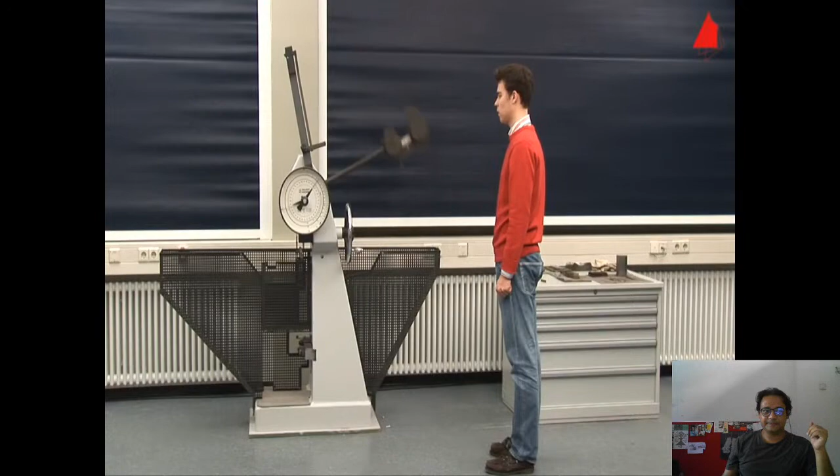So you heard, because of the test piece absorbing some amount of energy, the pendulum doesn't reach the other side. It's a very simple test, the construction of the whole thing is simple, but it gives such insightful results. The amount of energy absorbed by the specimen can now be read off at the position of the drag indicator. It only amounts to 13 joules in this test.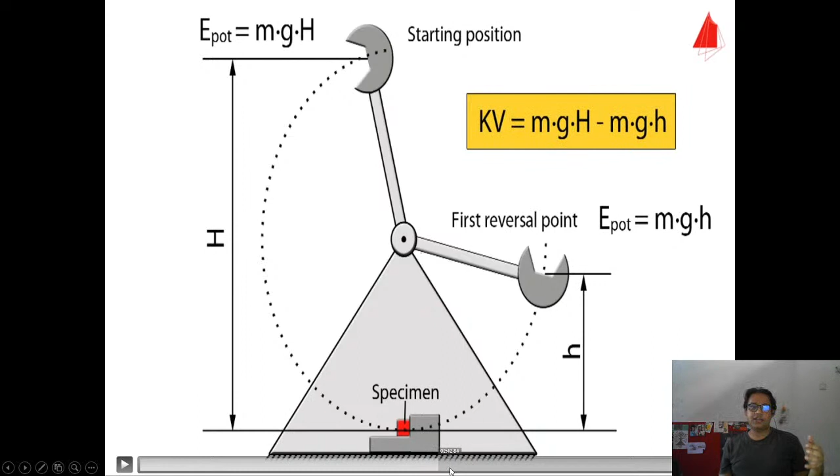Here is the main principle of the measurement. In its starting position, the pendulum only has potential energy. Once you have these slides, you can see the equations and all of that. So it is very easy to calculate the amount of energy that the specimen or the material has absorbed before it broke. This is exactly what toughness is, the amount of energy the material can absorb before it breaks.

So that was toughness. There are a lot of details I can't really add into this presentation in this format, but you should definitely go and see the texts around it. So these are the other ways in which the material can fail.

The first one is a material with a definite yield point phenomenon. It's a material which probably has a graph like this, so like this and like this, and this is the tensile stress.

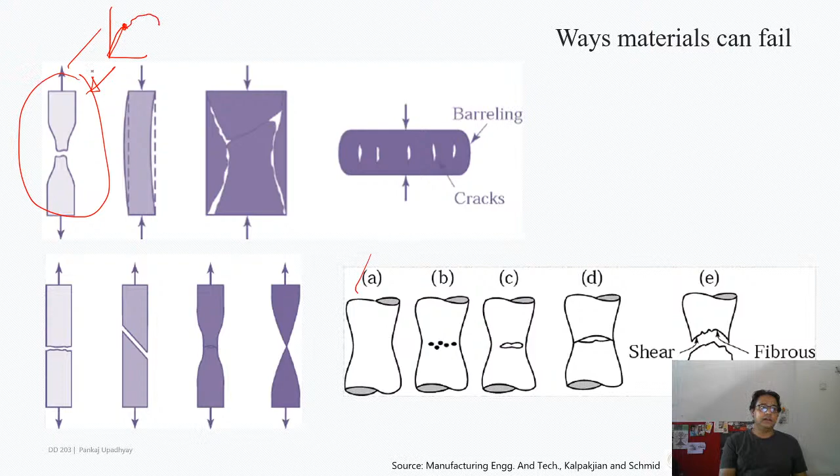Here's what sometimes happens. What do you think will happen when you have a perfectly straight rod and you press it like this? If the rod is short and if the rod is long, you will have different behaviors. Let's say it's the same material, something like steel. For a longer rod with a different dimension, it will buckle, it'll change its shape, it will go like this. This is called buckling.

Here, however, you will see something like this happening, it will barrel out, it will get squished. I think there's also a YouTube channel where some guy just squishes things with a hydraulic press. I don't know the channel name, I would have directed you to it.

Now this is different. If you do a tensile test, this image shows you different types of material and how these would fail. This is a material with a distinct yield point phenomenon, what we saw in the video. This one is a very ductile material which has a smooth curve, something like this, till it fractures. And this one, by the looks of it, is probably a slightly brittle material because of the way it is fractured.

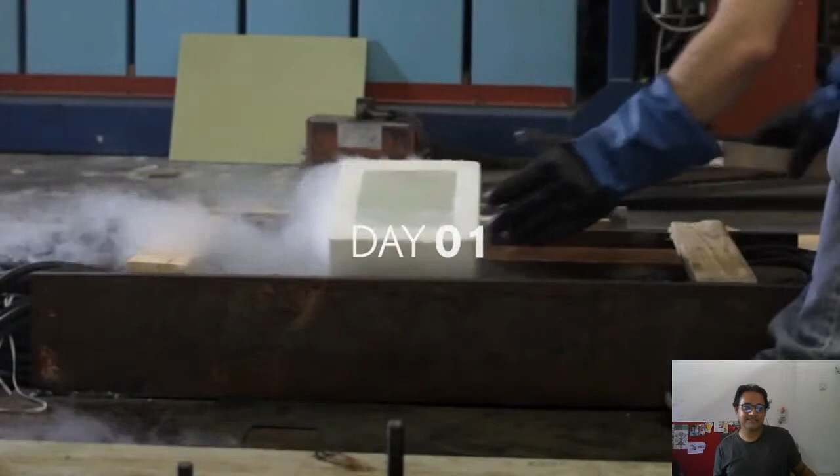Looks very unstable. Good. It wants to go, doesn't it?

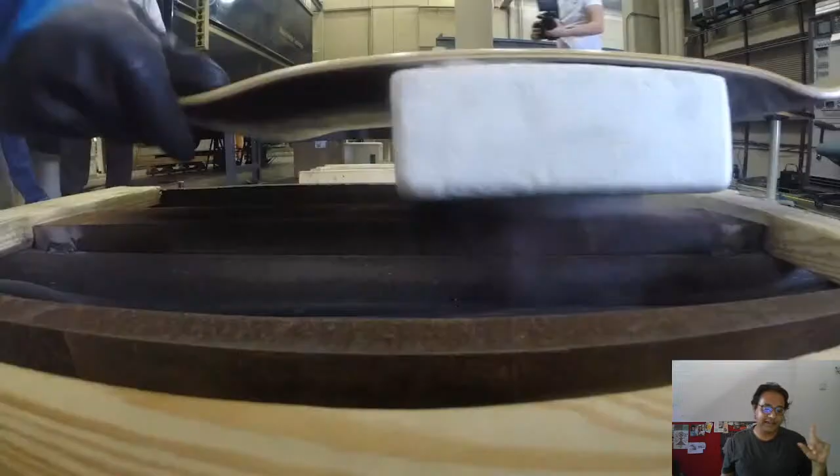So you're right, everybody said magnets. It's true, there is a magnet. Everybody said superconductor, that's true. Everybody said, or some people said, liquid nitrogen, that's true. But still the question that does not answer: what is the material property which is making, or which is being exploited to make this happen? Okay, that's the question.

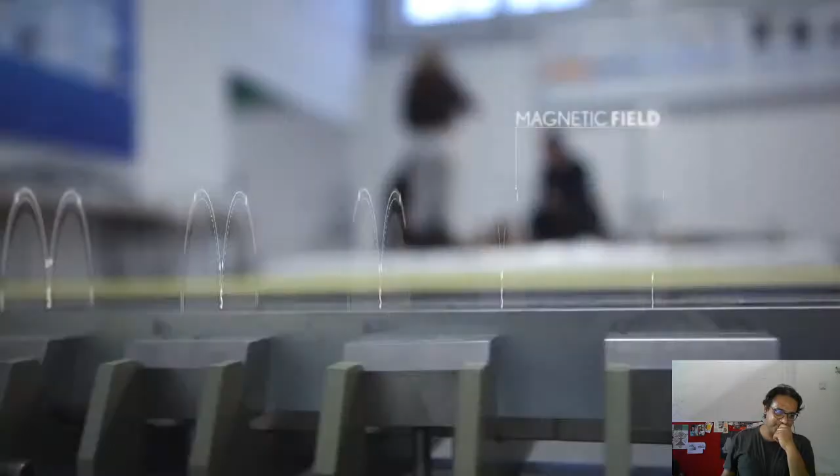Making a hoverboard isn't a straightforward process. We have had quite a few ups and downs because it's normal when you are trying to do something truly innovative. The system doesn't need electricity at all. We just use the superconducting material, a permanent magnet, and liquid nitrogen to cool down the superconductor. You just have to keep it cold to have a long hovering effect. The magnetic track has a certain magnetic field configuration, and this configuration is now also present in the superconductor. When they are cooled down, this field configuration is frozen in. When the superconductor stays in this position, it's an art of material science.

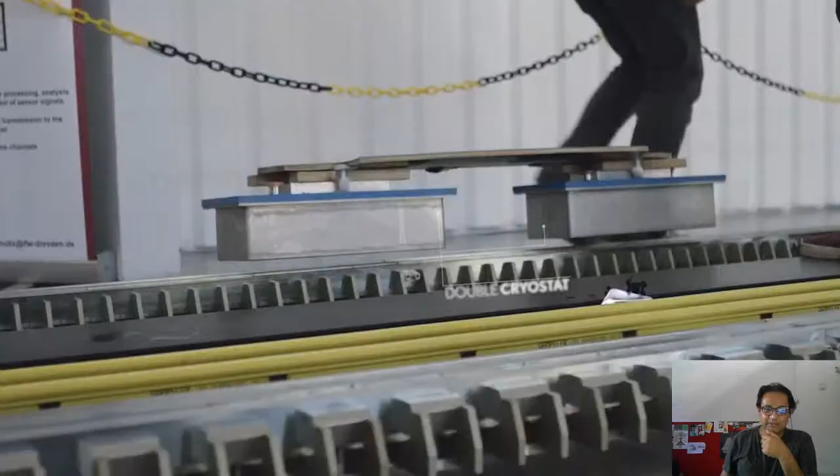So imagine the amount of money they've put into developing this, yeah. And for what? Advertising.

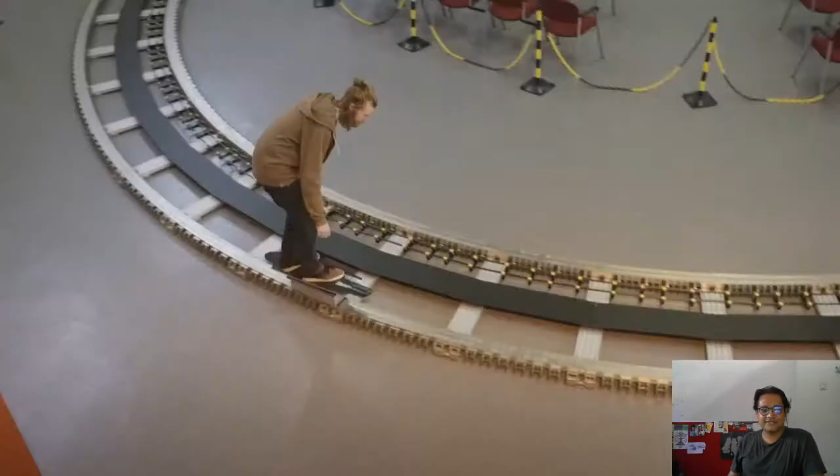When I came in, I think it wasn't going in the direction everyone wanted it to go. But when I seen it, I was well excited about it. I was like, I want to have a go, let's see what it is capable of. Within a week we'd progressed loads, we'd gone from just going 5 meters in a straight line to going around the corner as fast as we could, and then we started setting up the jump and making it higher and making the gap bigger, and we progressed quick, really quick.

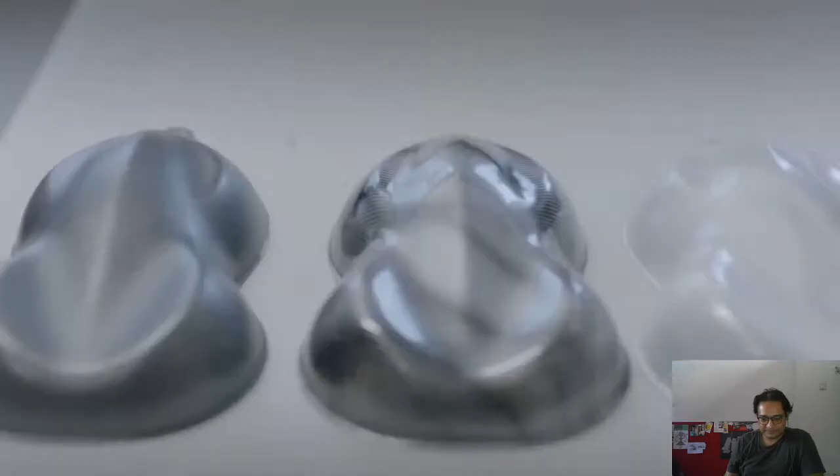I think there were distinct parallels made with the Back to the Future hoverboard, right? Yeah. Some of the design elements, like the spindle grille, and also the bamboo deck of the board. We're almost exactly replicating what's inside the Lexus car. There's the science part of it, and then there's the design and the beautiful part of it where we get to make it look amazing.

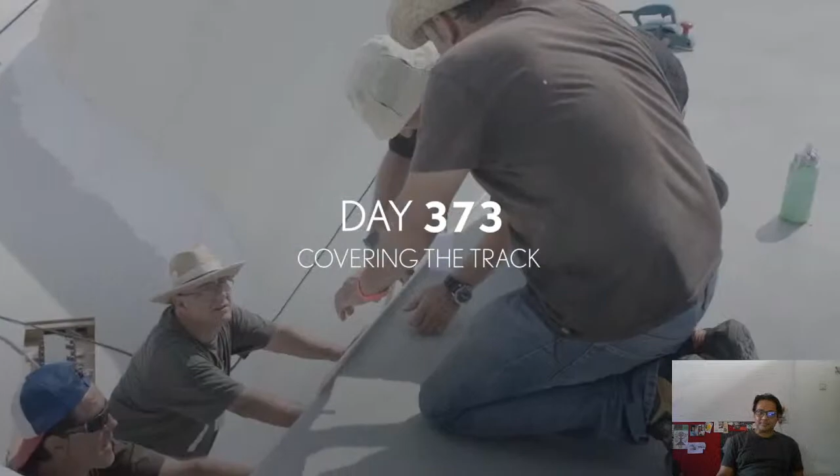Right, so they made this whole skateboarding arena with this embedded track. The feeling of literally no friction and floating on air, it's hard to describe what that really feels like, man, but it's kind of like a science in itself. You start to break it down, it starts to become less scary and less daunting, more fun. I started skating when I was about 7 or 8. It literally feels like I'm starting all over again from the beginning. Now I'm really born again, and then look, here's a skateboard, learn it. It's amazing.

So that's how it was done. Let's move on. Superconductivity is a fascinating phenomenon again, the video will be there for you to watch.

And how do they stop it? They let it crash onto a softer surface, I think.

Aditya asks, does this have any uses in the future, or is it just Toyota making money, a flex science project? I think it has a tremendous amount of real world application. In transportation itself, let's say in trains and all that, you could have these kinds of technologies in the near future. I mean, right now, to the best of my knowledge, there doesn't exist a superconductor which works like a superconductor at room temperature or higher temperatures, so you always have to cool it down to achieve that property.

But I think, as soon as you do that, interestingly, that is the whole plot of a film called Avatar, which brings us to the assignment.